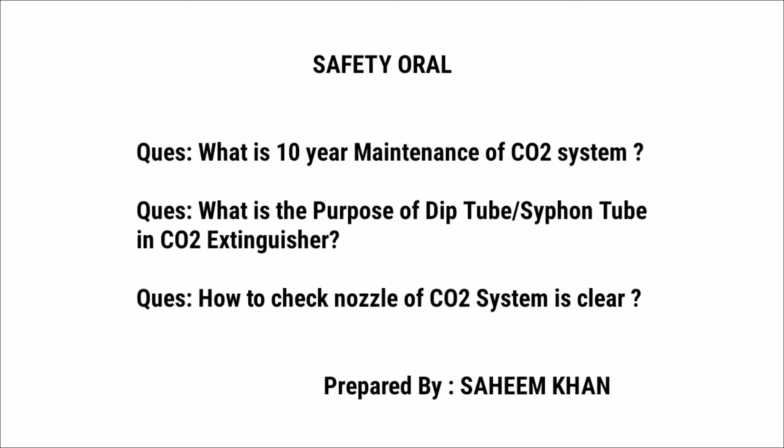So friends, in this video I have covered 3 questions asked in our safety oral. So the questions are: what is 10-year maintenance of CO2 system? What is the purpose of dip tube, siphon tube in CO2 extinguisher? How to check nozzle of CO2 system is clear or not?

So moving towards our first question, what is 10-year maintenance of CO2 system? So in 10-year maintenance, hydrostatic test is done. High pressure bottles should be subjected to periodical tests at intervals not exceeding 10 years. At the 10-year inspection, at least 10% of the total number of bottles provided should be subjected to an internal inspection, and hydrostatic test is done.

We have to keep in mind we should always take the random bottles from 100%, not by line. If one or more bottles fail, a total of 50% of the onboard bottles should be tested. Again, we have to take random bottles. If further bottles fail, all bottles should be tested. Flexible hoses should be replaced at the intervals recommended by the manufacturer and not exceeding every 10 years.

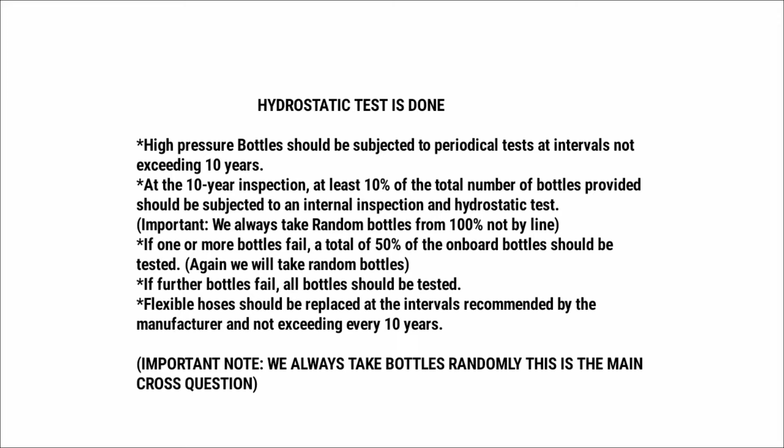If this question is asked, there is one cross question which is mostly asked. The cross question is whether we take random bottles or by line. So we have to say that we always take bottles randomly, not by line.

So moving towards our next question, what is the purpose of dip tube or siphon tube in CO2 extinguisher? Whether it is portable CO2 fire extinguisher or cylinder in CO2 flooding system, a siphon tube or dip tube is necessary inside the bottle. The function of dip tube is to deliver liquid carbon dioxide outside the bottle.

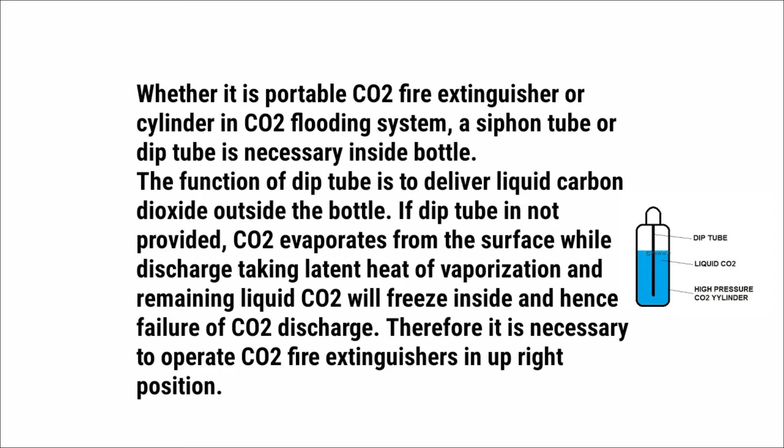If dip tube is not provided, CO2 evaporates from the surface while discharging, taking latent heat of vaporization, and the remaining liquid CO2 will freeze inside, hence failure of CO2 discharge. Therefore, it is necessary to operate CO2 fire extinguisher in upright position.

So as you can see, this is a CO2 bottle with a dip tube, or we can call it a siphon tube. There is liquid CO2, and above it there is gas CO2. So when we use this CO2 system, the gas CO2 will pressurize this liquid CO2, which will move out first, after which the gas CO2 will move out.

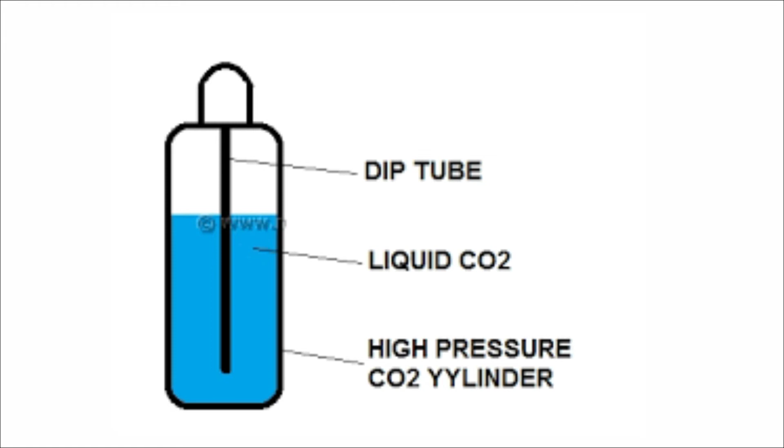So if this dip tube was not provided, the gas CO2 would have moved out, due to which this liquid CO2 would have frozen inside. So this is the function of the dip tube or siphon tube inside the CO2 bottle or cylinder.

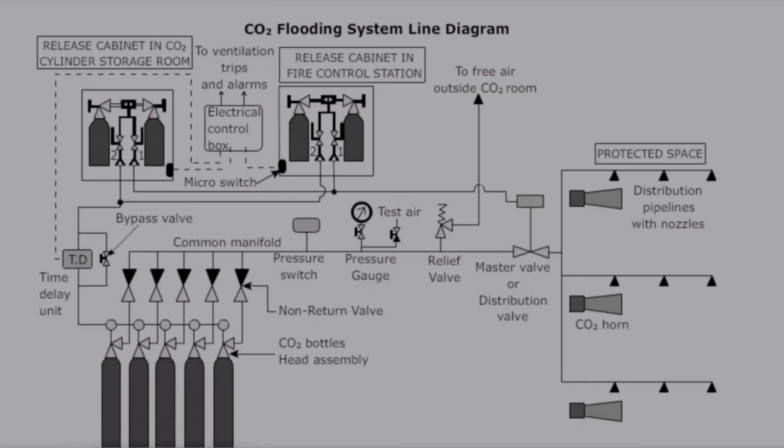So as you can see in this diagram, this is the line diagram of the CO2 flooding system. In this there is a connection provided for the test air, which is used to flush the line, and we can use this line to check the nozzles of the CO2 system. These were some questions which were asked for our safety orals.